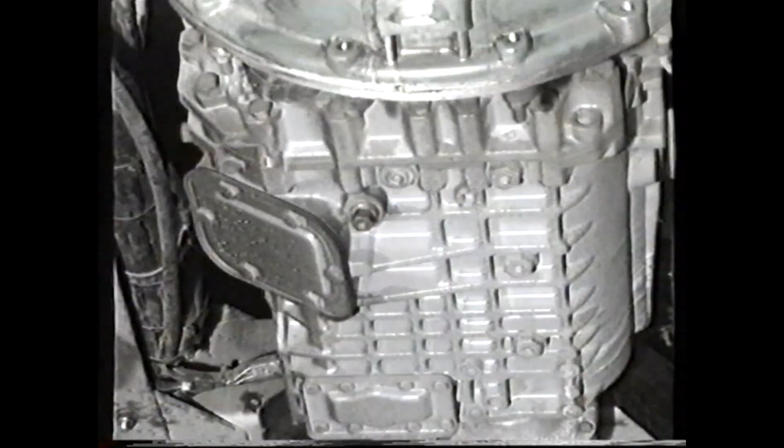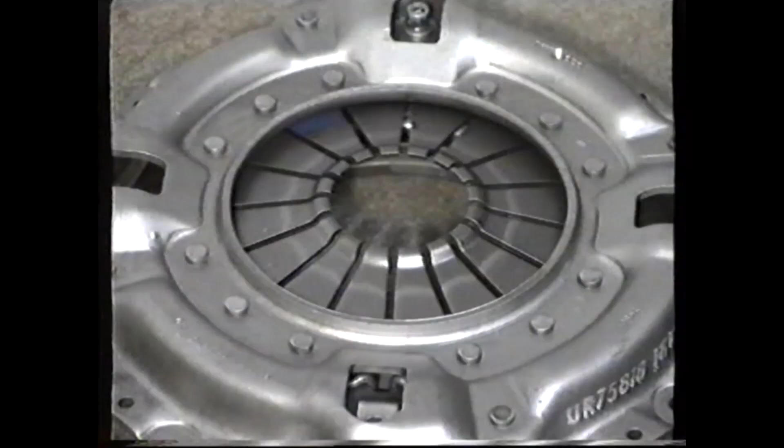We begin this transmission module by looking at the clutch system used with the manual ZF S6-36 gearbox. The drive input from the engine to the ZF manual gearbox is via a single-plate diaphragm spring clutch designated KB114B, which stands for K clutch, B Borg & Beck, 1 single plate, 14 14-inch disc diameter, and B the development code.

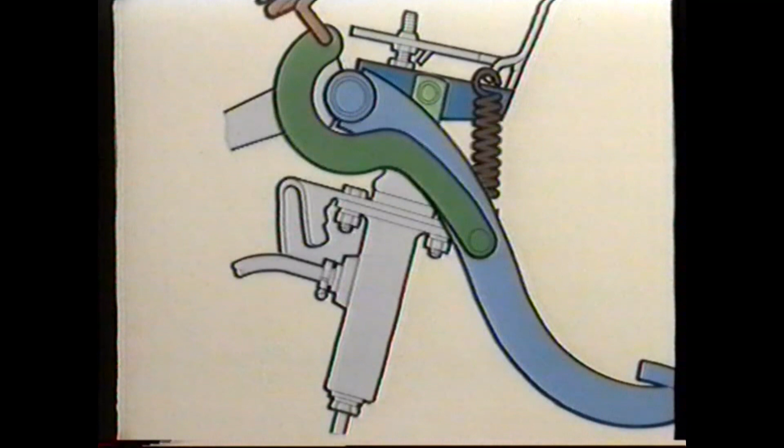Clutch control is by a conventional hydraulic master and slave cylinder system. In order to reduce clutch pedal load during disengagement, the clutch pedal has an over-center pivot action.

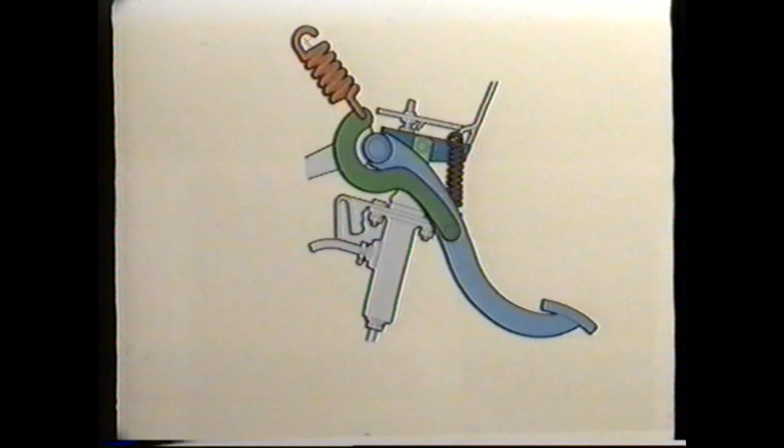When the clutch pedal is in the off position, this spring is acting directly through the pedal pivot point. However, when the clutch pedal is in the release position, the spring is assisting the pedal with disengagement because the spring forces are now acting with the pedal. The remainder of the clutch hydraulic system is the clutch slave cylinder.

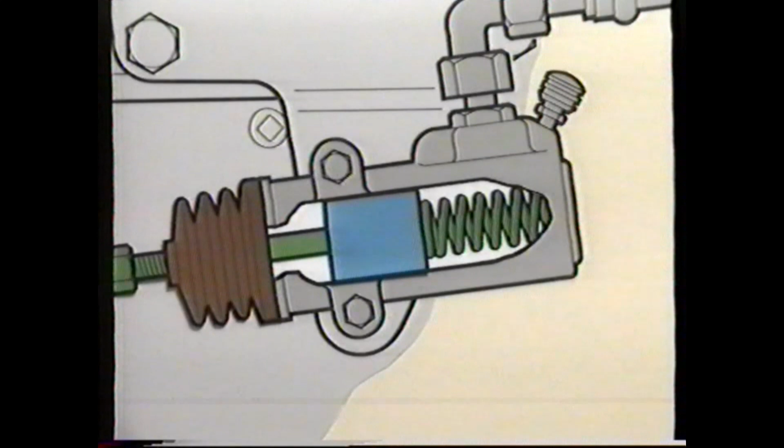From a maintenance point, the clutch pedal should have a clearance of 4 to 5 millimeters when in the off position. Clutch control: the clutch slave cylinder is of the clearance-free type.

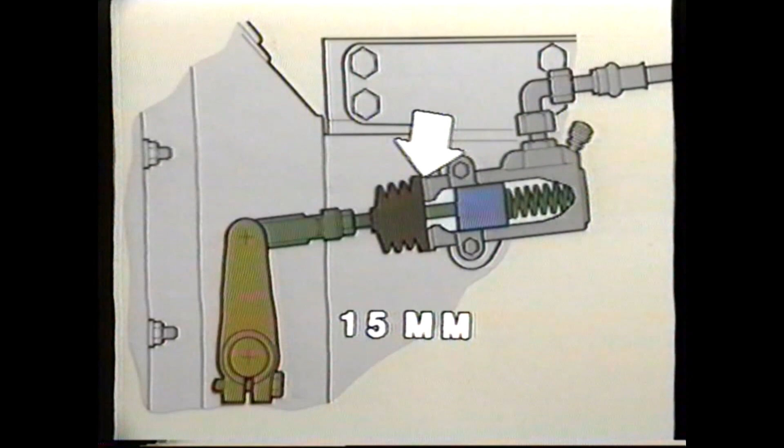With the clearance-free system, the operating piston in the slave cylinder is spring-loaded outwards. When the linkage is preset, the front of the piston takes up a position some 15 millimeters from the outer face of the cylinder. This positioning allows the right amount of lever movement for full clutch disengagement.

With the clutch cylinder preset in this way, a wear clearance of 20 millimeters is created between the rear face of the operating piston and the back of the slave cylinder.

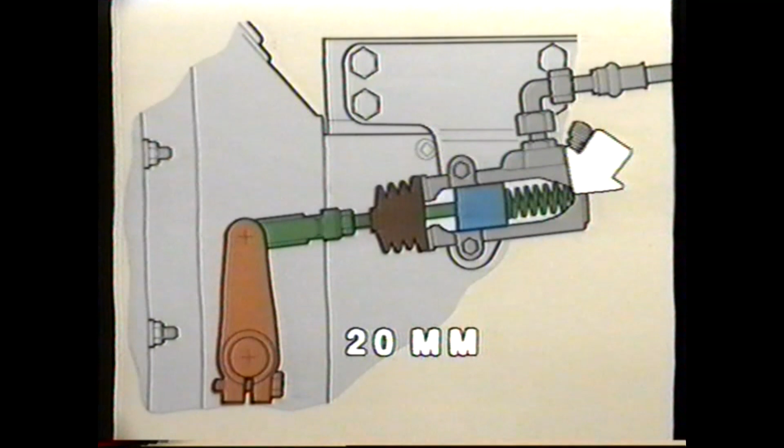As the clutch wears out, the outward pivoting action of the diaphragm on the cover assembly pushes the release bearing, fork, and operating lever backwards. With this rearward movement also acting on the operating piston, the 20 millimeters wear clearance to the back of the cylinder progressively reduces down to 0, at which point, if left unchecked, clutch slip would develop, resulting in premature failure.

Monitoring the wear clearance is therefore of the utmost importance from a preventive maintenance point of view and should be checked a minimum of every 3 months.

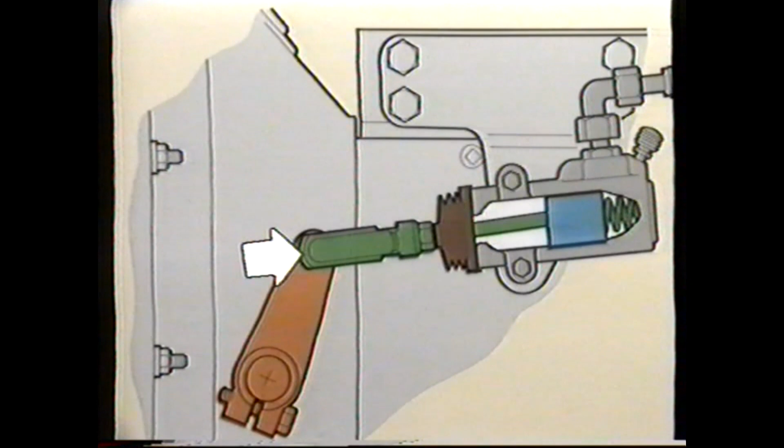To establish the wear clearance within the cylinder, first of all, measure and note the distance between the front of the cylinder and the center of the clevis pin. With a suitable lever or wrench, press in the push rod until the piston bottoms on the back of the cylinder, then measure and note this new distance. The difference between the two is the amount of wear clearance which is left.

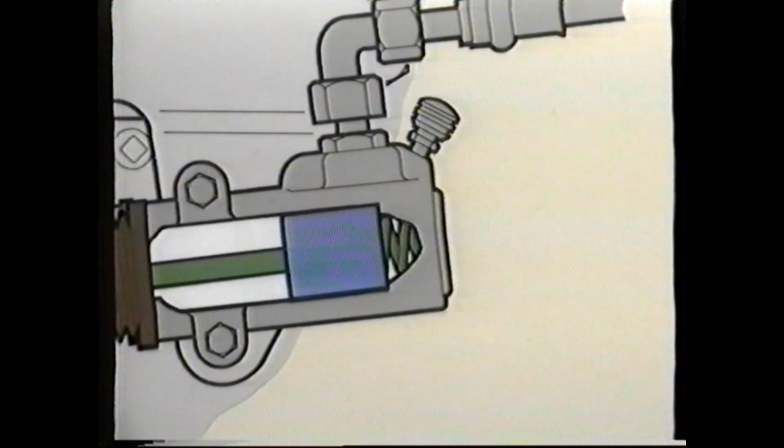When the wear clearance approaches 5 millimeters, it's time to reset the piston position within the cylinder. Clutch cylinder resetting: to reset the clutch cylinder where the piston wear clearance has reduced to between 5 millimeters and 0, first of all, slacken the lock nut on the push rod yoke.

Unclip and remove the clevis pin, then move the yoke clear of the lever. Due to the internal spring action, the yoke and push rod will be moved outwards until the operating piston comes into contact with the retaining clip at the front of the cylinder.

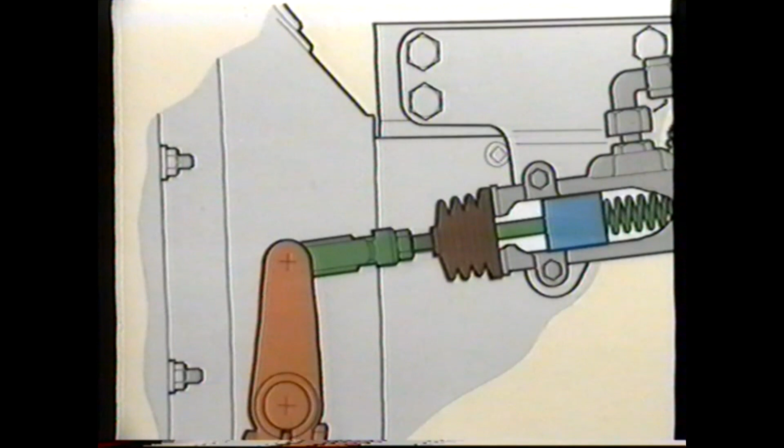Wind the nut back approximately 10 millimeters where possible, then screw the yoke in until it meets the nut. Realign the yoke on the lever. Refit and reclip the clevis pin. Then finally, retighten the lock nut.

With this resetting, the wear clearance would now be reinstated. Be aware that with periodic resetting, the lock nut will eventually run out of adjustment on the push rod. In this condition, when the operating piston wear clearance reduces to 0, the clutch center plate must be replaced.

Another important basic setting is the clutch operating lever, which should be positioned approximately 65 millimeters from the center of the clevis pin on the push rod and the bell housing to gearbox casing face. In this position, the lever will be pointing approximately 5 degrees rearward from vertical. This positioning is important from the point of view of base setting the clutch lever following clutch replacement.

Having set the clutch lever, it will be necessary to adjust the basic setting on the slave cylinder. This is done as follows: before connecting the push rod to the release lever, move the yoke clear of the lever, allowing the operating piston to be pushed to the front of the slave cylinder.

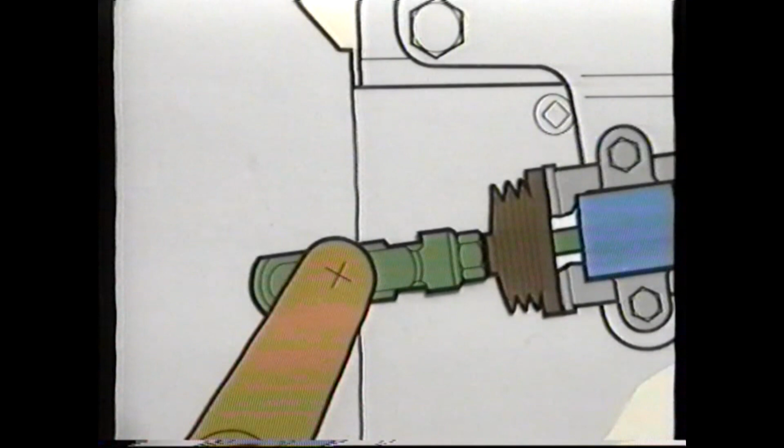Adjust the yoke until its clevis pin center is in a position 15 millimeters ahead of the lever clevis pin center. At this point, the yoke can be realigned with the lever and the clevis pin refitted and the lock nut tightened. As stated earlier, this 15 millimeter setting at the operating piston is to allow full clutch disengagement to take place.

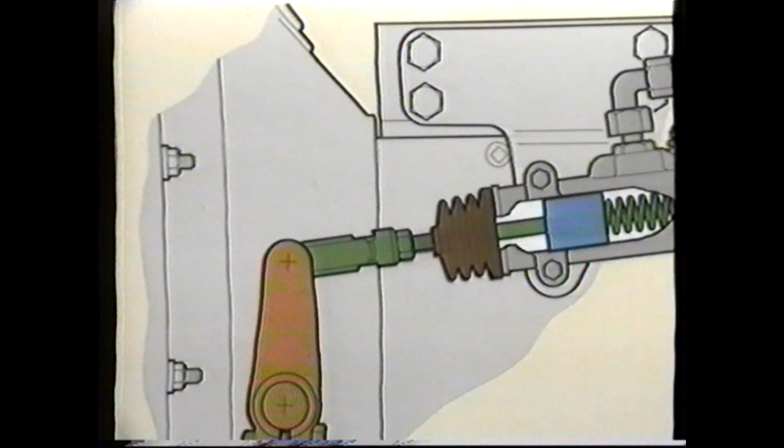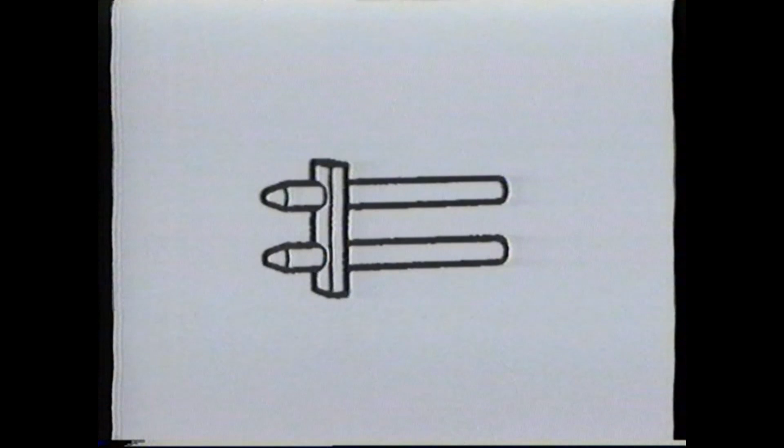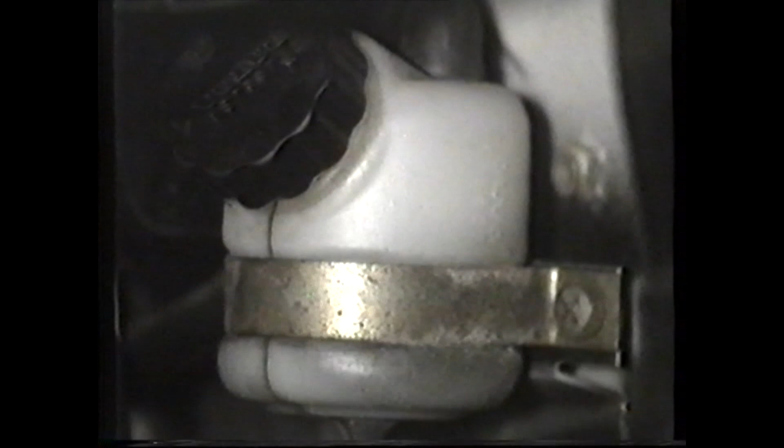Bleeding the clutch. Due to the design of the master cylinder, the clutch hydraulics must be power bled. This is done using the reverse bleed method, which pumps the clutch fluid through the bleed nipple on the slave cylinder, along the fluid line and into the reservoir via the link channel in the master cylinder.

The prescribed method utilizes a windscreen washer pump piped to draw fluid from a container, then pump it into the slave cylinder.

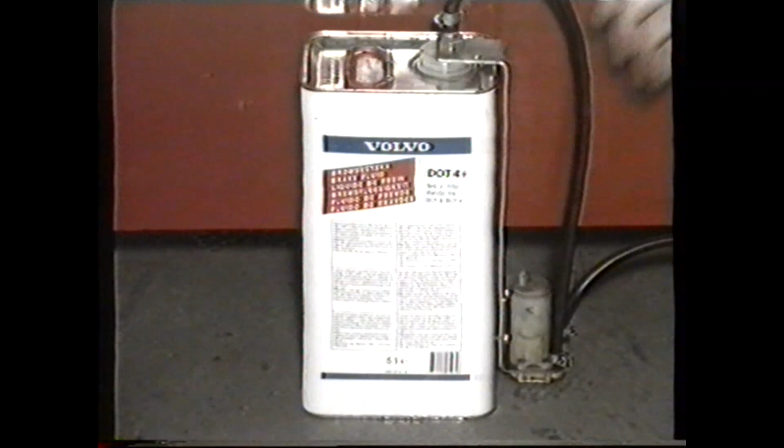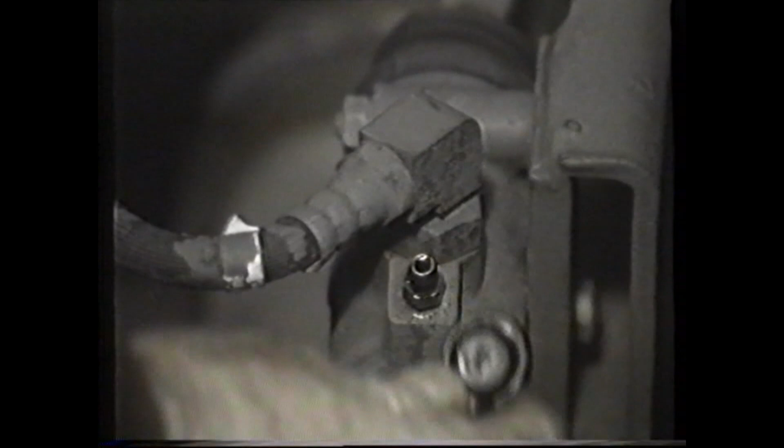The motor is connected to a voltage supply from the battery and controlled by a switch. To ensure the pipe does not blow off during bleeding, this simple adapter is used to clip the hose onto the slave cylinder bleed nipple.

An assistant should be used to monitor the level in the reservoir to ensure it does not overflow, remembering that clutch fluid is a solvent and can seriously damage paintwork.

It should be noted that only clutch fluid with the specification of DOT 4+ may be used when replacing or topping up. Module 4, Transmission Systems. Section B, ZF S6-36 Manual Gearbox.

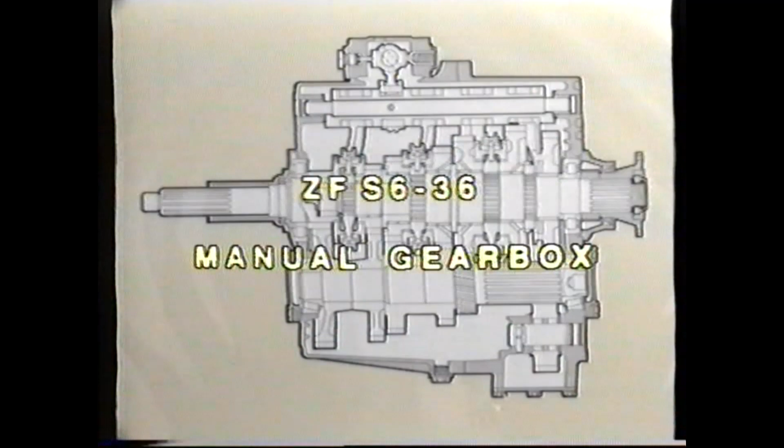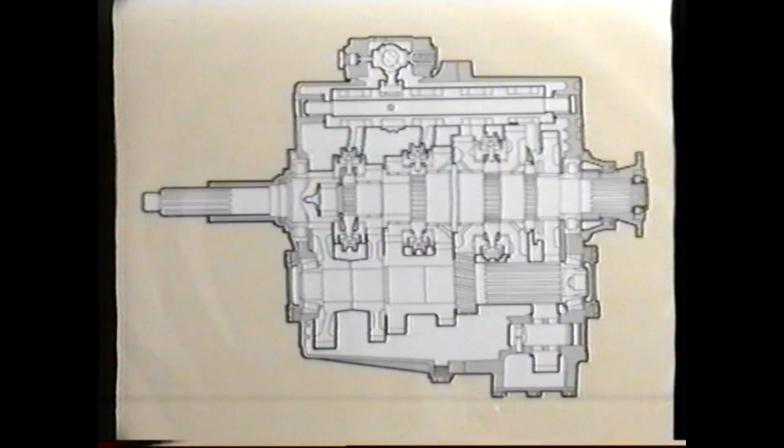Let's now move on to the first of the three gearbox options offered. The ZF S6-36 is a 6-speed synchromesh gearbox which has a forward gear ratio spread ranging from 7.4 to 1 for first gear through to 1 to 1 in sixth. The gearbox is conventional in layout with an input shaft, counter shaft and main shaft.

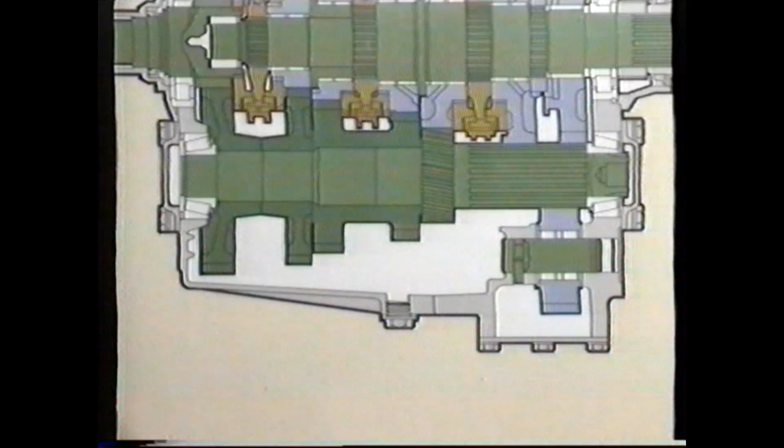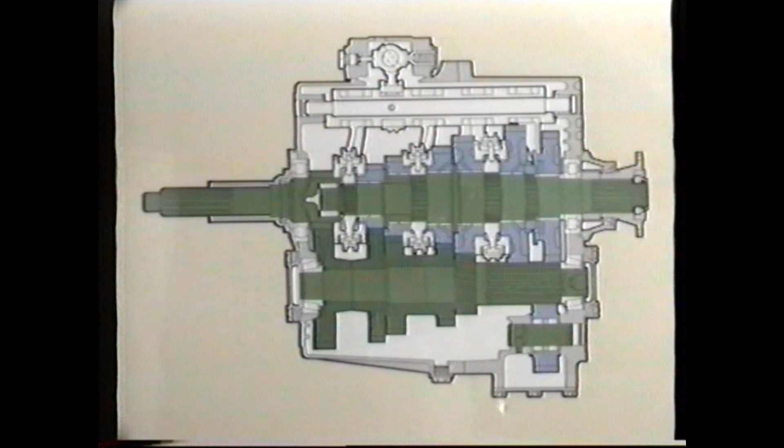The input and main shafts are supported on roller bearings, whilst the counter shaft is on taper roller bearings. The idler gears on the main shaft are supported on needle roller bearings. Gear selection is by synchronized sliding coupling sleeves.

Control from the gear lever is via two cables. One cable creates lateral movement across the selector gate, while the other is for gear engagement.

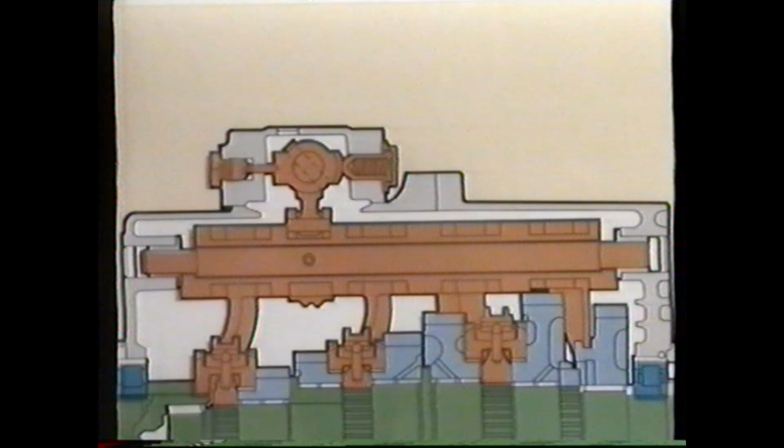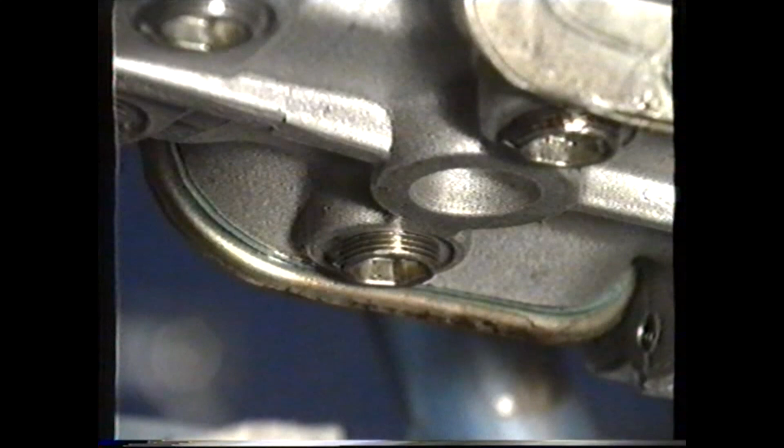Manual gearbox maintenance. Generally speaking, the gearbox oil should be changed every 12 months. Refer to the lubrication chart for all current oil quality, viscosity recommendations and change intervals.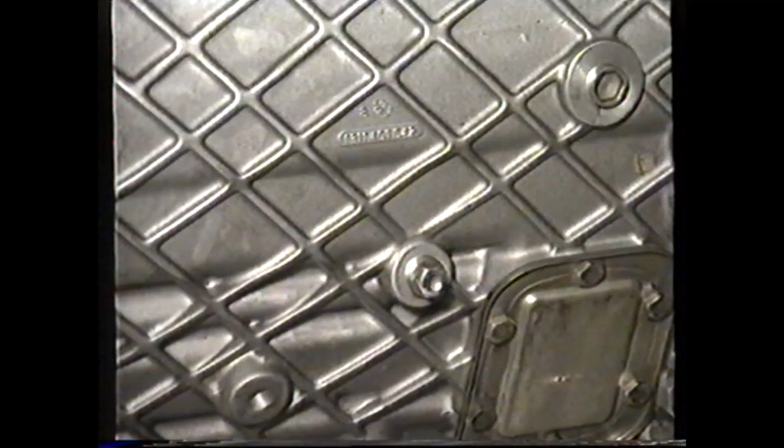The drain plug has a magnetic insert to remove metal particles from the oil. This must be cleaned prior to refitting. The oil level plug is here. When the level is correct, the oil should be in line with this lower edge and be felt on the threads.

The next transmission variant to be considered is the ZF 4HP500 fully automatic. Before proceeding, however, with the maintenance routines, let's briefly consider the basic design and function of the gearbox itself.

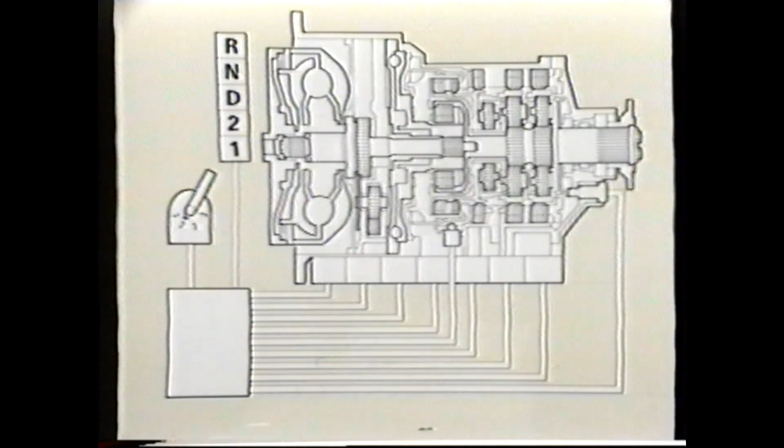The HP500 is a 4-speed, fully automatic gearbox, the drive system of which comprises a compound epicyclic gear train and a series of hydraulically engaged multi-plate clutches, which lock the various members to create different reduction ratios.

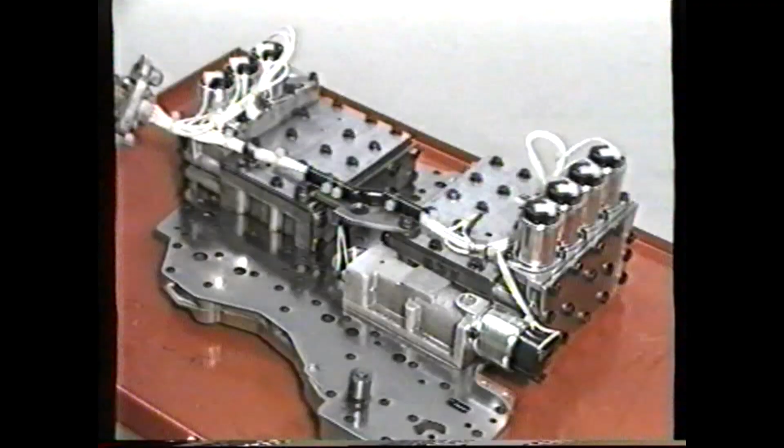Contained within the base of the gearbox is the main hydraulic valve block and the electrical solenoid valves which control gear selection. Gear shifting is controlled by a separate computer-controlled panel, which is designated EST18.

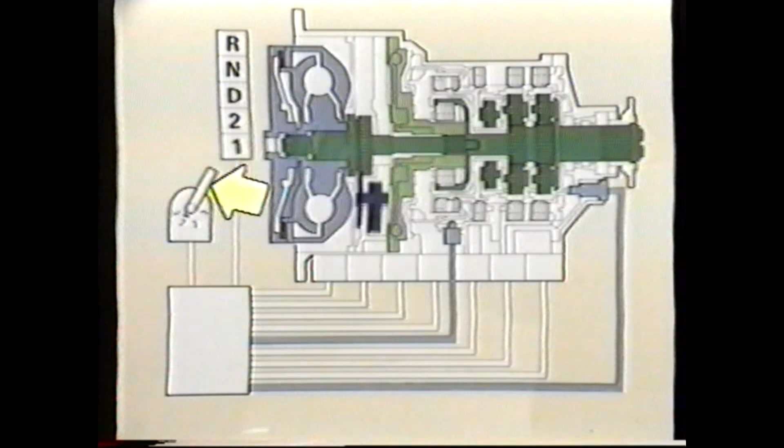The control panel receives information about road speed and engine speed from two sender units in the gearbox, one on the output shaft and a second on the input turbine. Throttle position and engine load are indicated by a load sender unit connected to the throttle linkage.

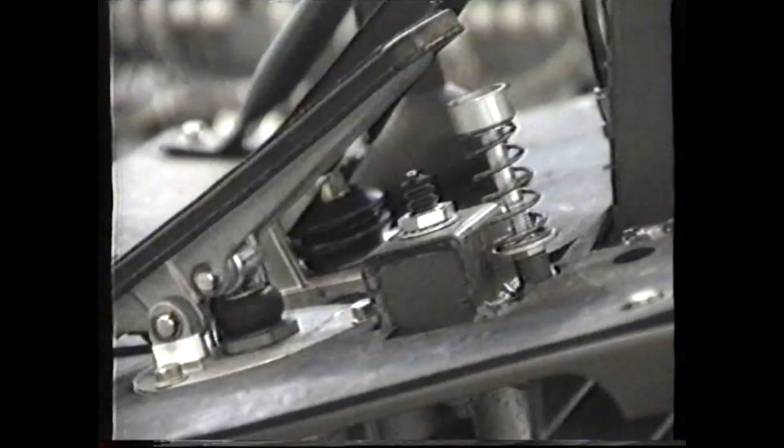There is the gear selector switch, which transmits the relevant gear and program instructions. Finally, there is the kickdown switch, which allows a lower ratio to be selected where conditions demand performance driving or hill climbing.

With performance driving, the signal to the control panel from the kick-down switch will result in upshifting at higher engine speeds than normal.

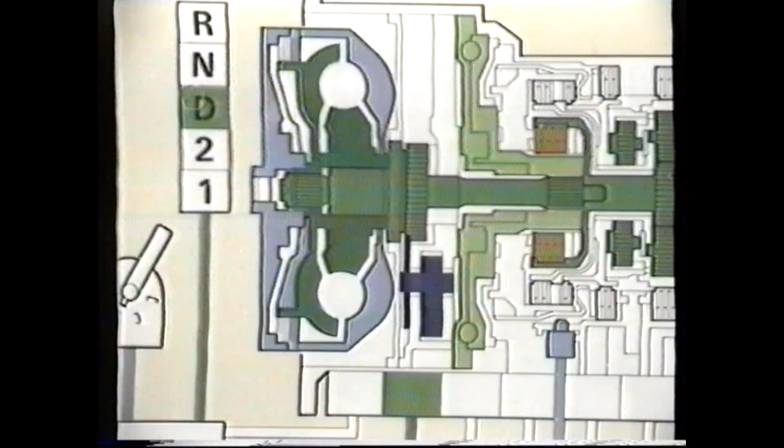The drive from the engine enters the gearbox via a torque converter, which incorporates a lock-up clutch to preserve fuel economy. When D is selected, EST18 control will engage lock-up automatically, while accelerating from standstill in first gear.

The engine speed at which lock-up occurs will, however, vary depending on load and throttle position. Once engaged, lock-up will remain engaged during all subsequent upshifts.

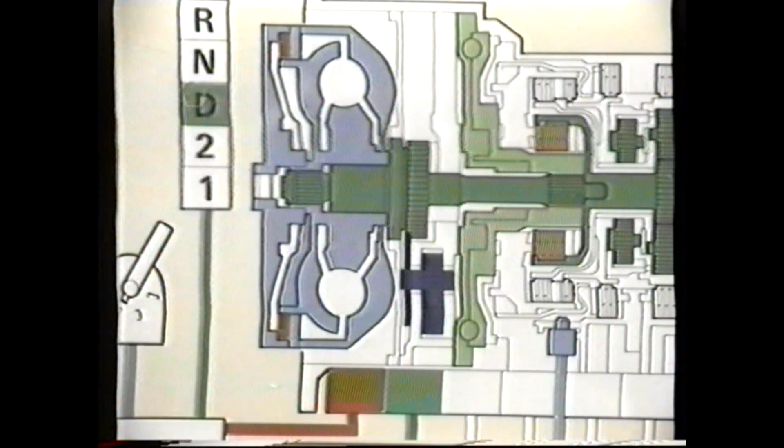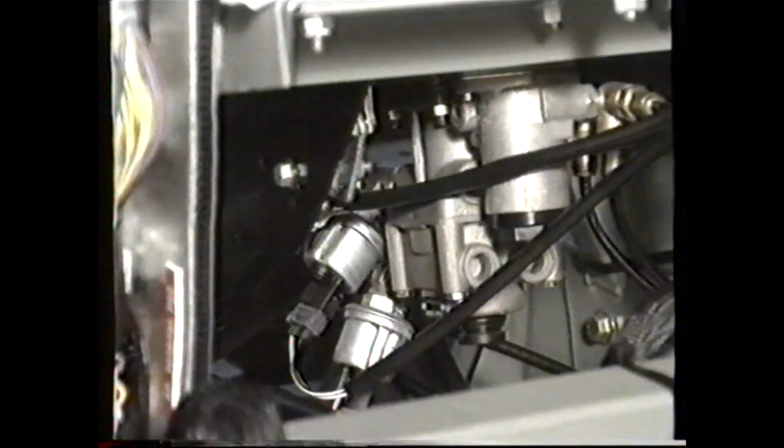Also featured in the HP500 is an integral hydraulic retarder, which supplements the main vehicle braking system. The retarder is activated by the stoplight switch, which is controlled by this air modulator valve mounted on the foot brake valve.

The level of retardation force is dependent on air pressure delivered by the modulator valve, which can be varied between 0 and a maximum of 3.2 bar. It is important to note that this pressure is delivered over the first 9 degrees of pedal movement prior to service brake application.

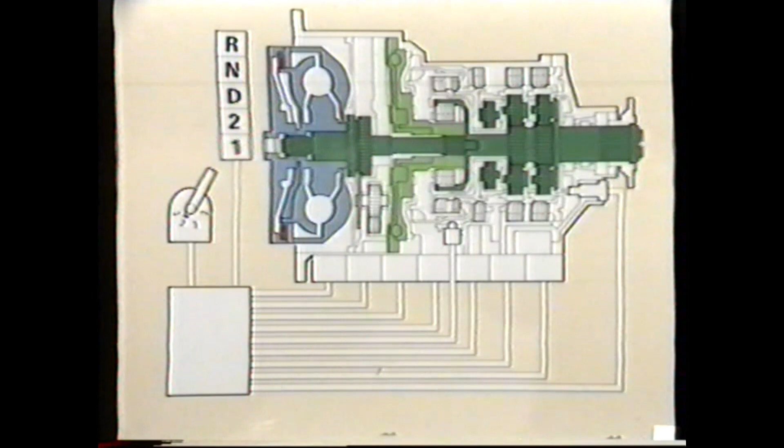An oil pump driven by the input shaft supplies oil pressure to activate the gears and provide lubrication to the gearbox components.

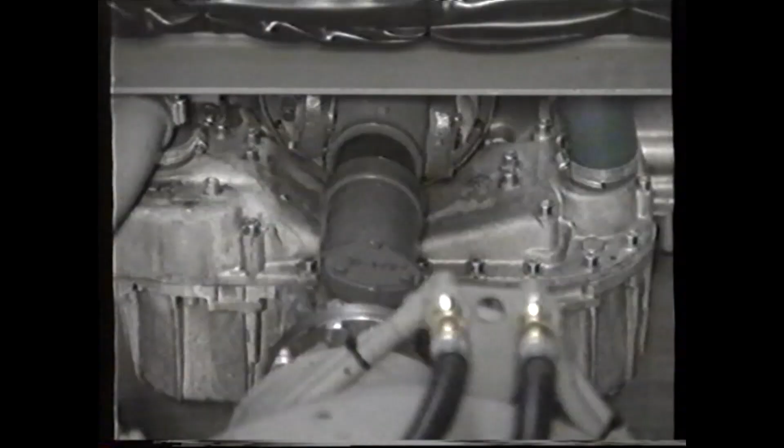Gearbox oil temperature is controlled by an oil cooler unit, with filtration being provided by an internal oil filter positioned on the suction side of the oil pump.

One of the major benefits of an automatic gearbox is that driving is made easy, with the control panel making the decisions on the most appropriate gear shift points depending on the conditions.

However, before being able to drive the vehicle, certain vitally important information must be known and acted upon. First of all, neutral on the gear selector switch must be selected before the engine can be started. The inhibitor relay controlling this is built into the electrical distribution center.

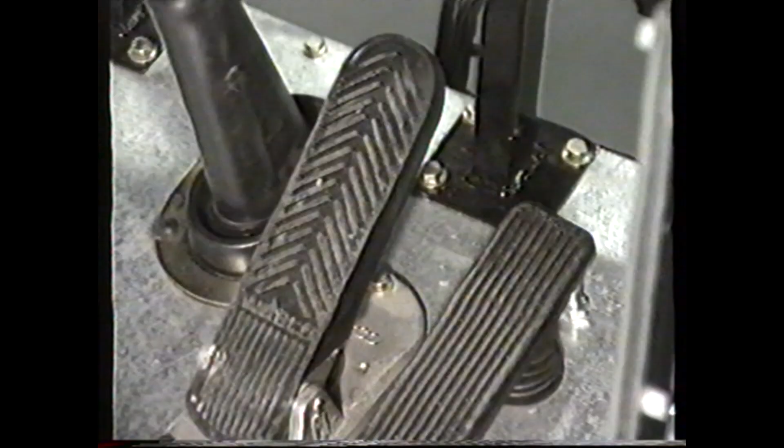Once the engine is started, to move off, one of the drive options must be chosen, either D, 1, 2, or R. It must be noted that the brake pedal must also be depressed at the same time as the gear selector button is pressed. This will allow full gear engagement and drive to be authorized.

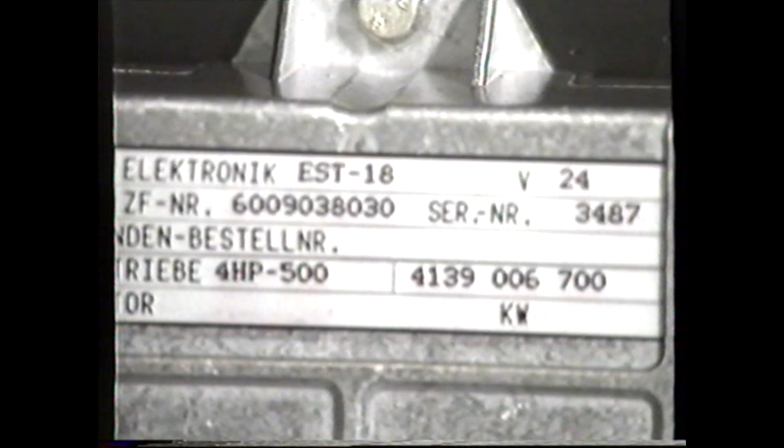This action sends a voltage signal from the stoplight switch to the gear control computer. This is a safety feature to prevent unauthorized gear selection when the vehicle is stationary, with the park brake released and the driver not in attendance.

It must also be noted that certain gear selector buttons are interlocked. Should, for example, position R from D be required, N must be selected first, which places the switch in neutral. Be aware that only when the vehicle is at a complete standstill should reverse be selected. With the foot brake pedal pressed, then released, the vehicle will now fully engage and drive in reverse.

Maintaining ZF 4HP-500.

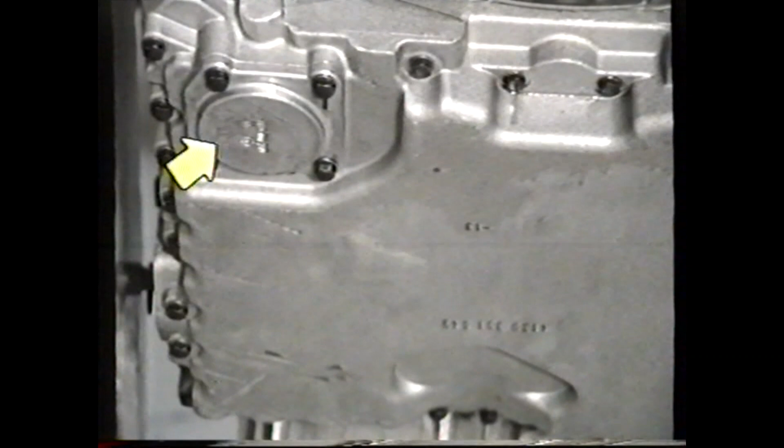Moving now to the maintenance on the gearbox. In order to carry out an oil and filter change, the transmission should be at normal working temperature. The main drain plug is located here. To gain access to the filter, remove this cover plate and withdraw the filter element.

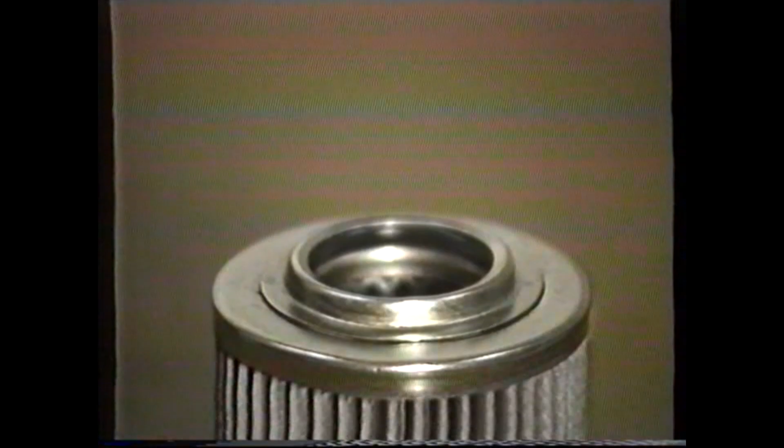Ensure that the O-ring on the replacement filter is in position. Offer up the filter, then push it into position. Replace the O-ring on the cover and refit, torquing the retaining bolts to 22.5 Newton meters.

It should be noted that because the oil filter is on the suction side of the pump, it is essential it be replaced at the recommended intervals, as a blocked filter would result in serious internal damage to the transmission due to progressive loss of oil pressure, causing gear clutch slip and loss of drive.

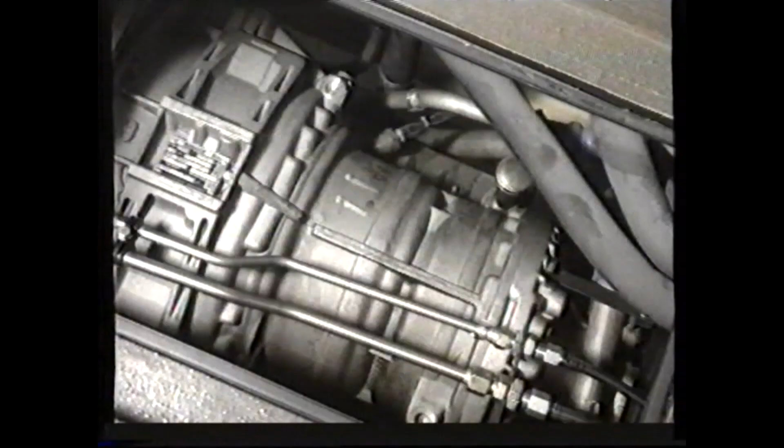To refill the gearbox with oil, initially add 15 litres. Start the engine and allow to idle, and then top up until the oil level is between these two marks.

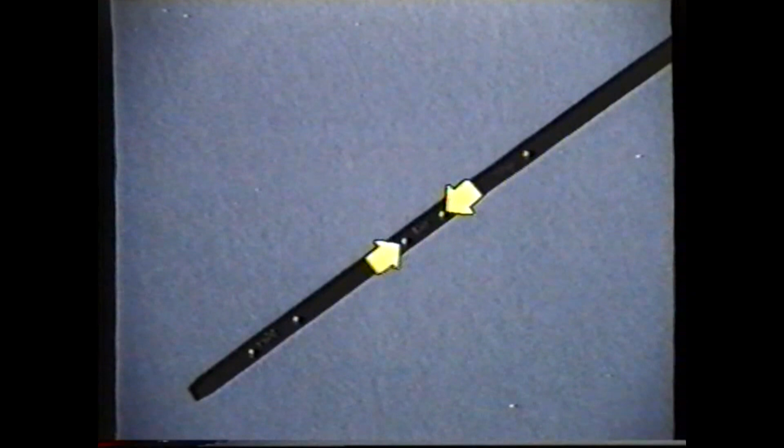To complete the oil filling procedure, bring the gearbox to its normal working temperature of approximately 80 degrees centigrade. With the engine at idle, the oil level, when correct, should be between these two marks. This final procedure is known as a hot check and is the only accurate method to establish the precise oil level.

While checking the oil level when hot provides the most accurate level indication, a cold check also offers a provisional guide, as the level must be between these two marks for it to be considered safe to start and drive the vehicle. Where a cold check reveals 10 millimeters or less, as shown here, the vehicle must not be driven. The reason for the low oil level would then require to be investigated and rectified.

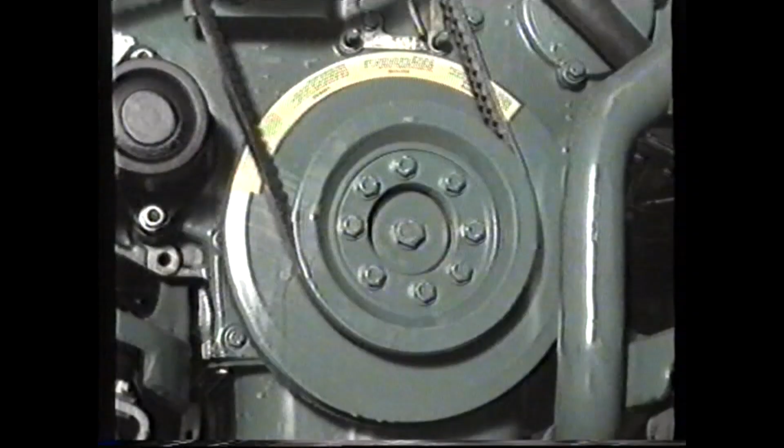Engine idling speed should be set to give 500 RPM with the gear selected and in drive. With the park brake applied, this speed enables adequate lubrication to be maintained within the gearbox.

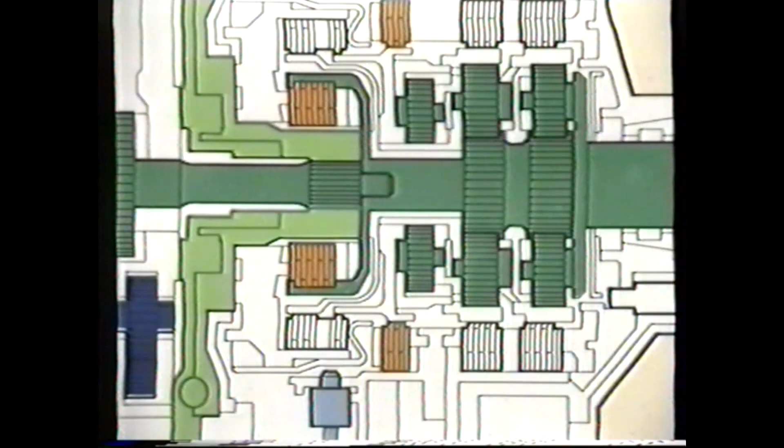With the ZF-HP500 control system, the ESD18 computer panel has the ability to detect certain transmission faults. For example, it will detect transmission failure due to gear clutch slip in drive or during gear changes, or a speed signal failure from the turbine sensor. With these conditions present, the driver's gear selector switch lights will flash continuously, indicating the seriousness of the fault.

Where these conditions are present, the fault must be immediately investigated and rectified before the vehicle re-enters service. The control system is designed to record up to 55 faults and store them in the panel's memory, and also the number of times that fault has occurred.

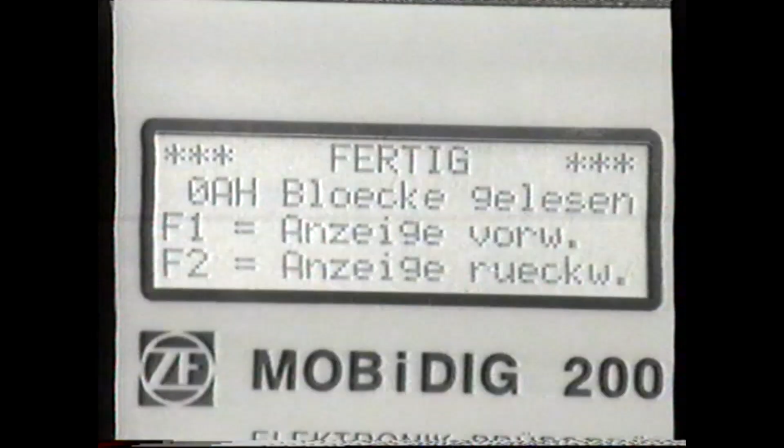To extract this information from the panel, this test kit, known as the MOBiDIG 200, is plugged into this lead, and by operating the fault diagnosis program, a fault code will be displayed here, and the number of times the fault has occurred. By cross-reference to the manual, the fault area can be identified so that action can be taken to rectify the fault.

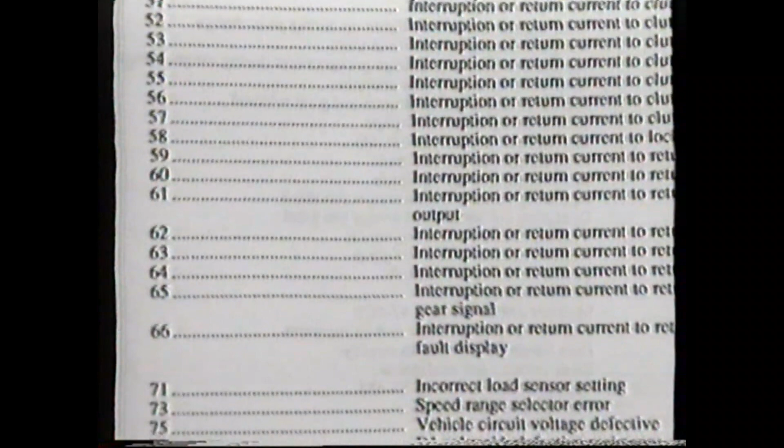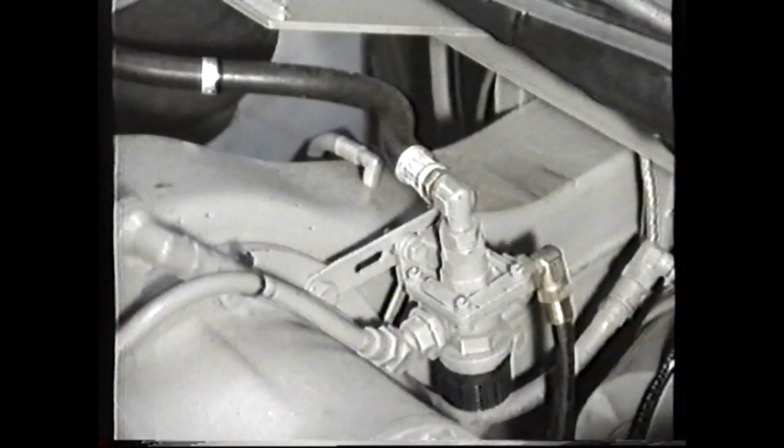Whilst in this area, ensure the axle breather is clean. Failure to observe this will cause the axle to become pressurized when hot, resulting in oil leakage from the differential pinion seal or alternatively the hub seals.